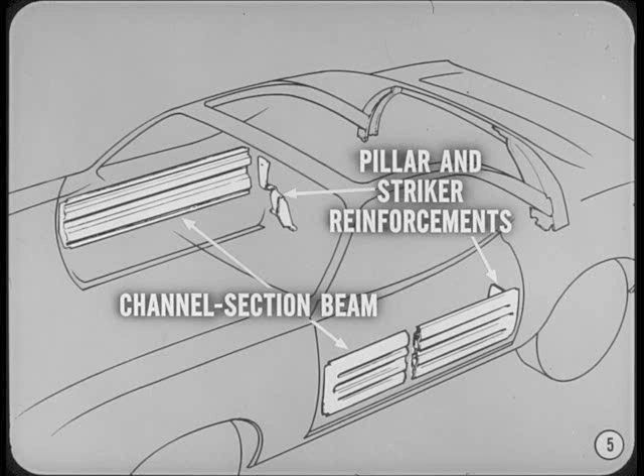Also, the lock pillars and strikers have additional reinforcements to resist accidental door opening in a collision. There are box section support structures built into both sides of the rear roof area to give more rollover protection. Along with this, the windshield header and roof rails are fully boxed to further strengthen the roof structure.

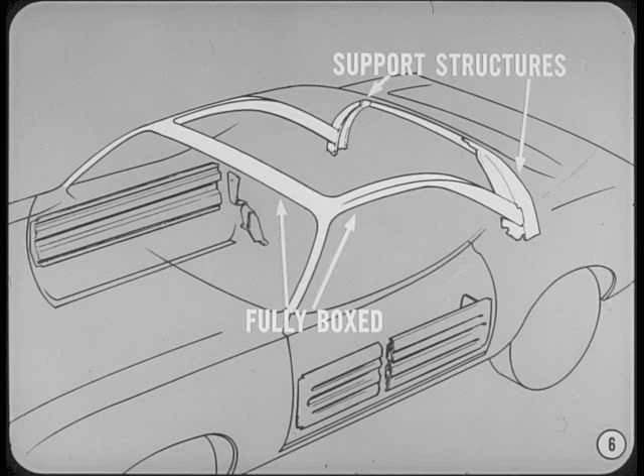The new flush-mounted outside door handle operates by lifting up and out to provide greater protection against accidental door opening. The door lock cylinder is located next to the lift handle and can be serviced through a hole in the inside door panel under the trim.

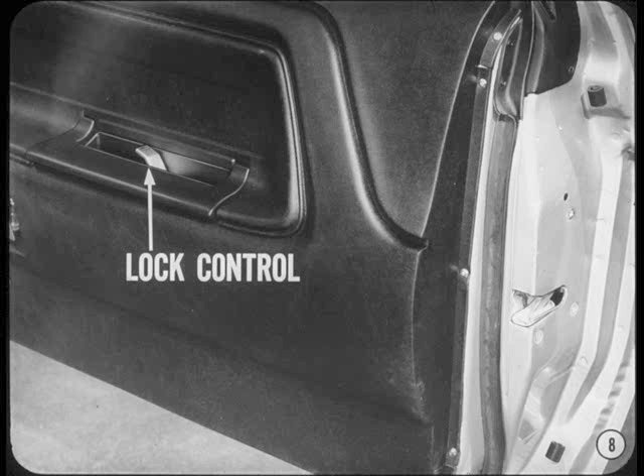On the inside, you'll find the door lock control located in the hand grip recess of the armrest. This new toggle lever control is convenient for the driver and passenger, but the location makes attempts at theft more difficult. A conventional link rod connects the toggle lever to the door lock.

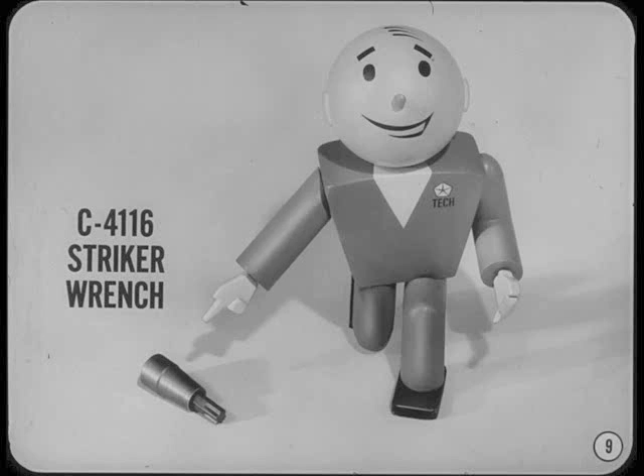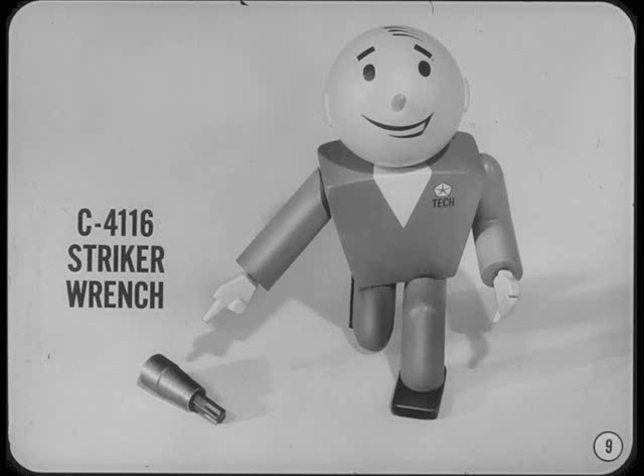Thank you, Bob. By this time, all you technicians should be familiar with a special wrench needed to adjust the door latch striker. So we'll let it go at that and move on to the steering columns. Ready to go, Joe? All ready, Tech.

Starting again with the Barracuda and Challenger models, we've got a brand new steering column with a corrugated impact-absorbing member at the upper end. The corrugations fold one by one to absorb impact energy. Actually, servicing the new steering column is simpler because the impact member is at the top, above the gear selector lever.

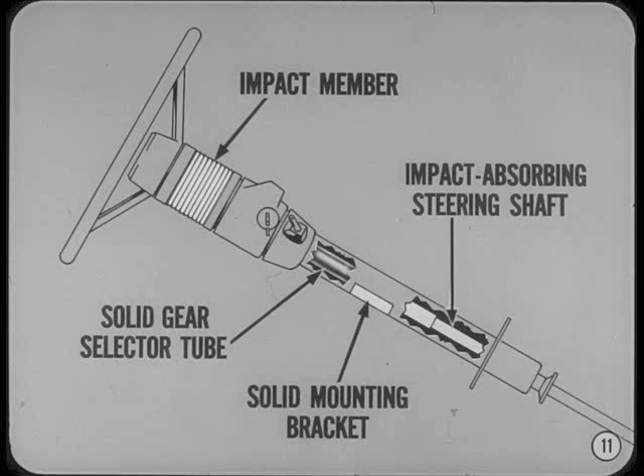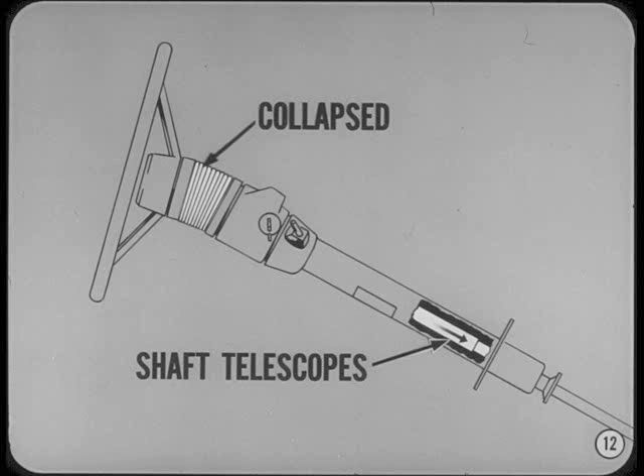While this design still requires an impact-absorbing steering shaft, it uses a solid gear selector tube and a solid mounting bracket. In other words, if the upper member is collapsed, but lower steering column parts are not damaged, you can replace the upper members separately. Of course, with complete or partial collapse, the steering shaft telescopes and must be replaced to restore its energy-absorbing characteristics.

As for removal, 3 stud nuts attach the steering wheel to the top of the collapsible member. When the wheel is off, you'll notice that the hub at the bottom has 2 tapped holes, so you can use a steering wheel puller to remove the member from the steering shaft.

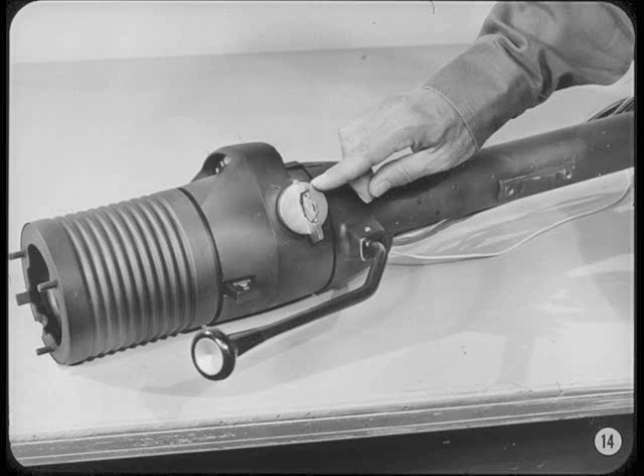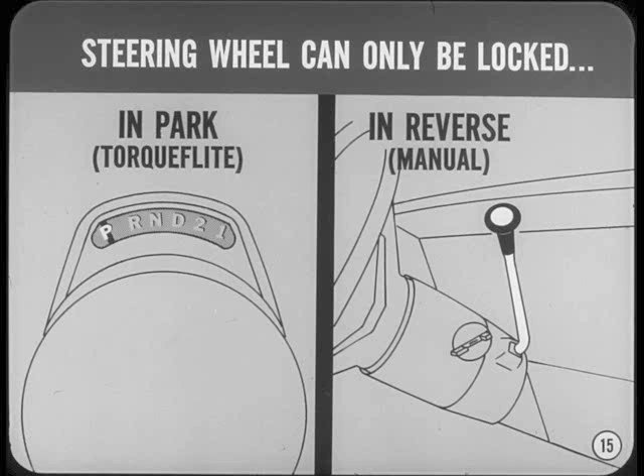Now, moving on to other features, all models now have a combined steering wheel lock and ignition switch located on the right-hand side of the steering column. As you probably know, the wheel cannot be turned when the key is either in lock or accessory position. The steering wheel can only be locked when the TorqueFlite selector lever is in park, or the manual transmission shift lever is in reverse. This arrangement keeps the steering wheel from locking when the car is moving forward.

In addition, the key can be removed only when the switch is in lock position. If the key is left in the lock, a buzzer reminds the driver to remove the key when either front door is opened. The locking mechanism in our standard columns is sturdy and simple.

Here's how it works. The heart of the lock mechanism is a pivoted 2-piece lock lever and its operating cam. The key cylinder turns the cam to tilt the lock lever in or out of mesh with the gear selector housing and the steering shaft lock plate. Turning the cam also operates the ignition switch.

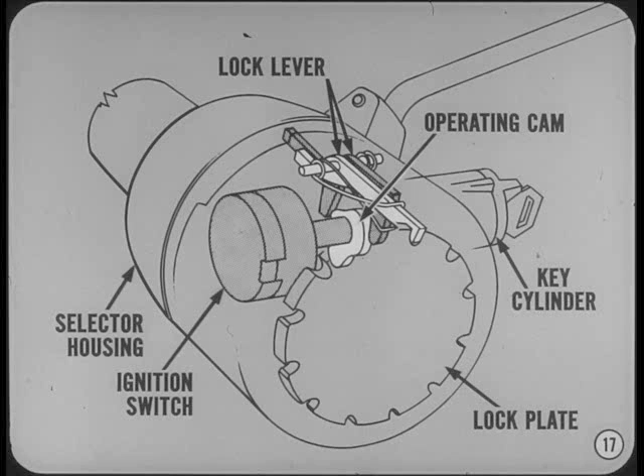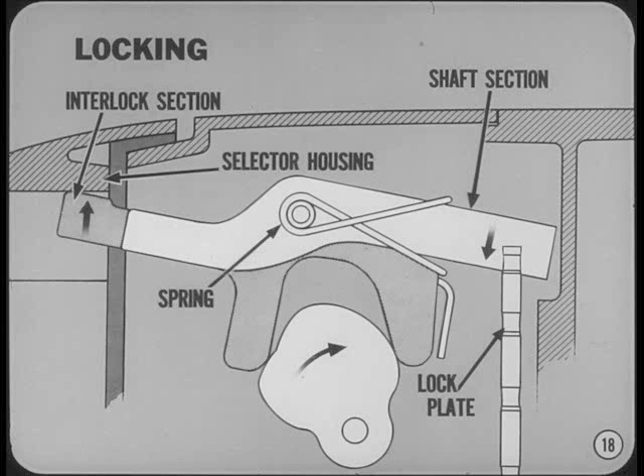In the locking direction, the cam moves the selector interlock section of the 2-piece lever toward the selector housing wall. This movement spring-loads the steering shaft section of the lever and moves it into mesh with the steering shaft lock plate.

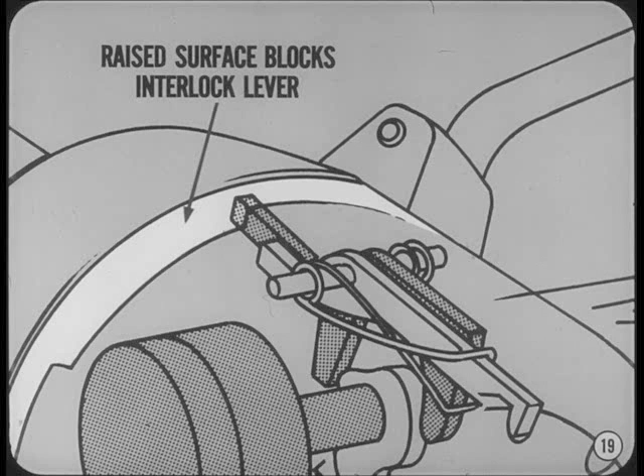If the gear selector lever is not in locking position, a raised surface in the selector housing wall blocks movement of the interlock lever. This blocking action limits the operating cam rotation and keeps the entire mechanism from going into lock position. Cars with a floor mount selector have a separate slave linkage, which moves the column selector housing to the locking position.

Remember that adjustment of both the slave and the selector linkage affects steering lock operation. If the adjustment is off, you may not be able to turn the ignition key to the lock position.

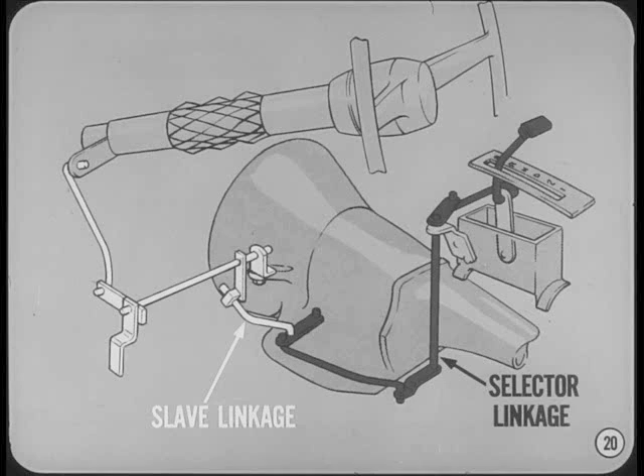Now, on columns with a tilt wheel mechanism, the key cylinder turns a toothed sector, which causes a sliding bolt to move in or out of the steering shaft lock plate. The sector also moves a rack and sliding bolt to provide a selector lever lock.

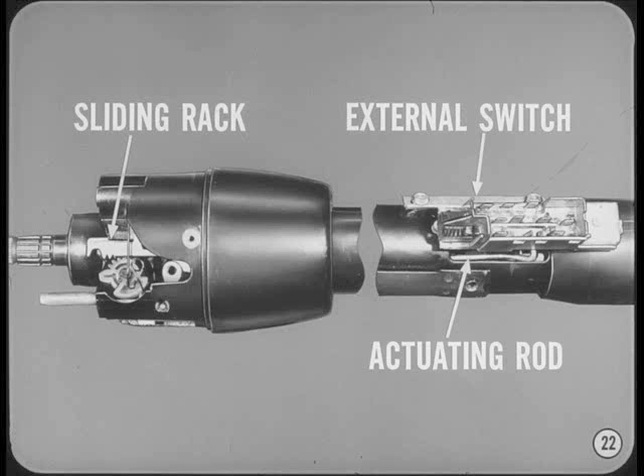On the tilt wheel columns, an actuating rod attached to the rack operates an external ignition switch. Well, that's because these columns don't have space for the internal type switch used on standard columns.

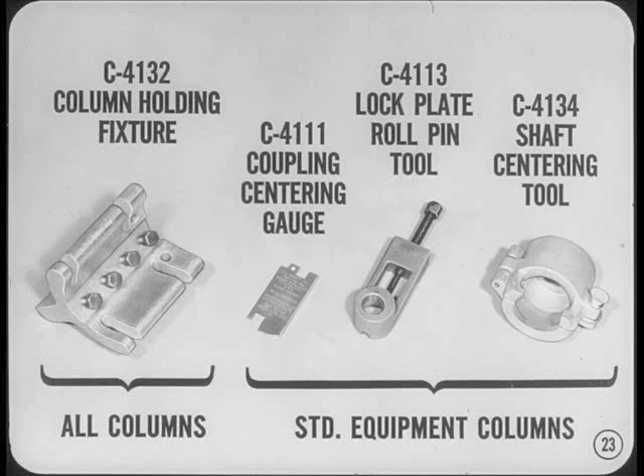As you might expect, steering column changes call for new special tools. There's a new holding fixture for all energy-absorbing columns, old and new. For standard equipment columns, you'll need the new coupling centering gauge, lock plate roll pin tool, and the shaft centering tool. In addition, there's a new lock plate nut socket and a retaining ring installer for tilt columns.

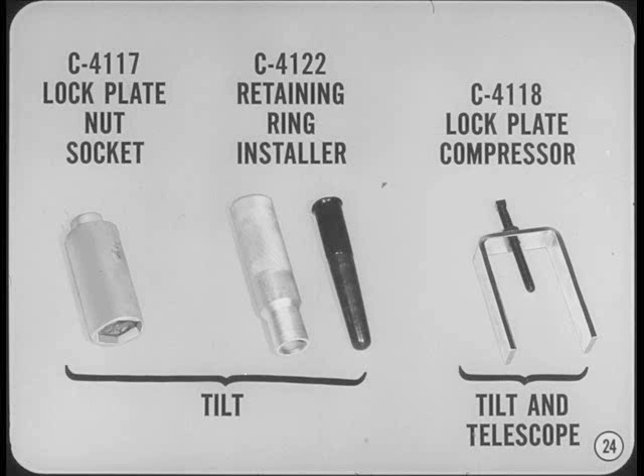And for tilt and telescope columns, the new lock plate compressor makes the job easy. Did I skip anything, Tech? Well, the shift linkage adjustments of some models are relocated for easier servicing. But we don't have time to cover linkage details right now, so if there's any doubt about adjustments, be sure to check your service manuals.

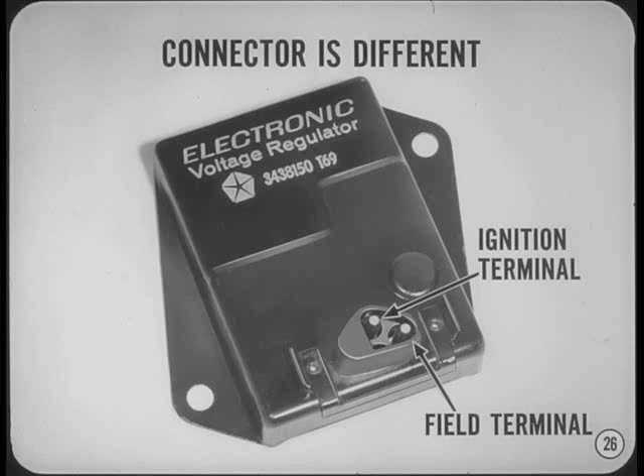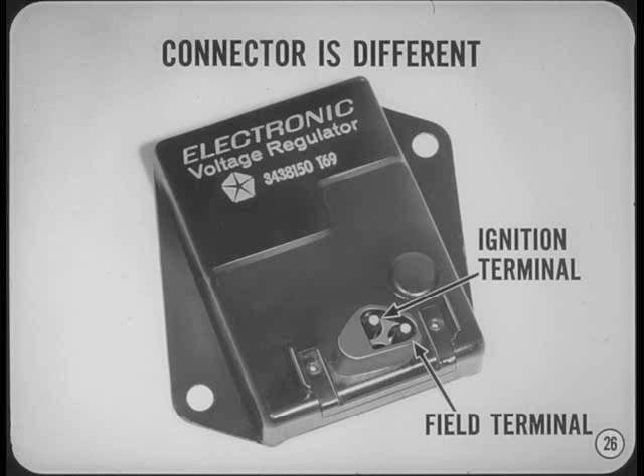Bob, what's new in the charging system? All models now have the new electronic voltage regulator. This unit is similar to the earlier model, but the circuit connector is different, so it's not interchangeable. Since these regulators do not have moving parts or adjustments, they are serviced by replacement.

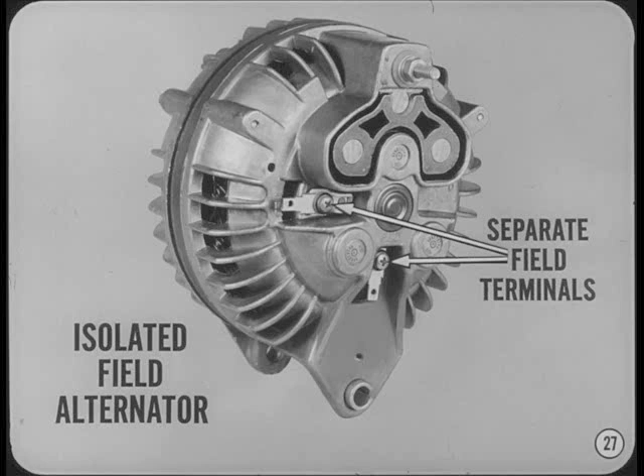A new isolated field alternator is used with the electronic voltage regulator. Both field rotor brushes now have separate connector terminals, and there are corresponding changes in the circuit. As with the voltage regulator, this alternator is not interchangeable with the previous model.

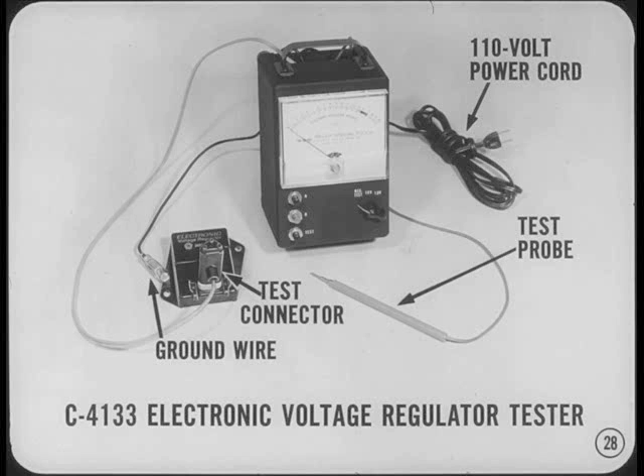The new electronic voltage regulator tester makes charging system checking easy. For either type regulator, you simply plug in the test connector, clip on the ground wire, and plug in the power cord. The test probe is used for alternator output and other voltage checks.

And while we're talking about things that make servicing easier, you'll find the new wire terminal removal tool a real time saver when you work on the new pin-type connectors. Press the connector down on the tool to unlock the wire terminal tabs and pull the wire out of the connector block.

On Imperials, the outside radio antenna is no more. The antenna now consists of two concealed wires sandwiched in the laminated windshield glass. The wires run upward at center and across the top of the glass to both sides. The antenna connection is located at the center of the windshield base.

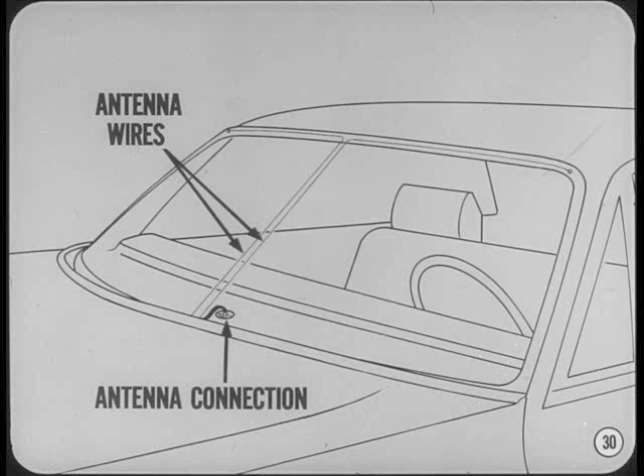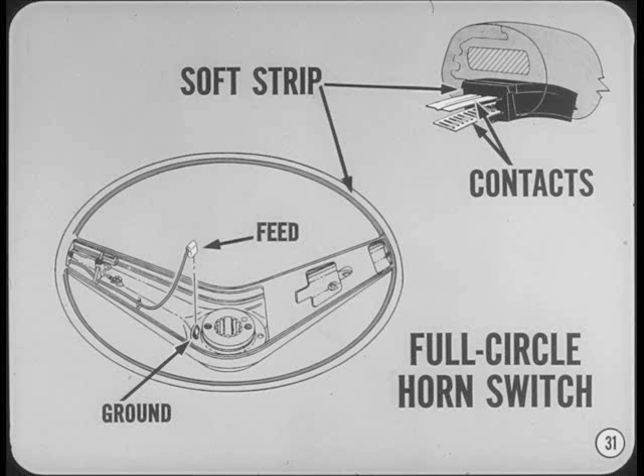Also standard on Imperials, the new full-circle horn switch operates when you squeeze the soft strip on the inner surface of the steering wheel rim. Strip contacts in the rim close the circuit when pressed together. This feature is optional on other models.

Combined lamp and reflector type body side markers are now used on all models. As on previous models, the lamp housing must be removed for lamp replacement. Thank you, Bob. That'll keep the electricians busy for a while. Right now, it's time to hear from Joe on air conditioning features.

Okay, Tech. All of our manual-type air conditioning systems now have a new pilot-operated EPR valve. Except for the specs, testing procedure remains the same as before. The valve adjustment is preset and should not be disturbed.

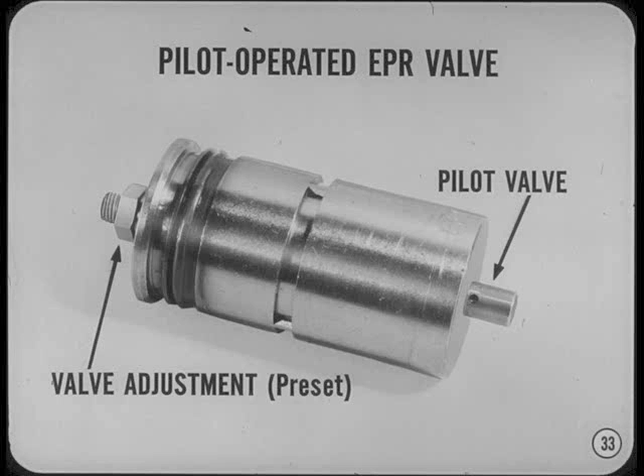As the name suggests, the pilot valve triggers the main valve to make overall EPR valve operation more sensitive and precise. Only the piloted EPR valve can be used in our current air conditioning systems, but replacements for earlier systems can be either the piloted or non-piloted type.

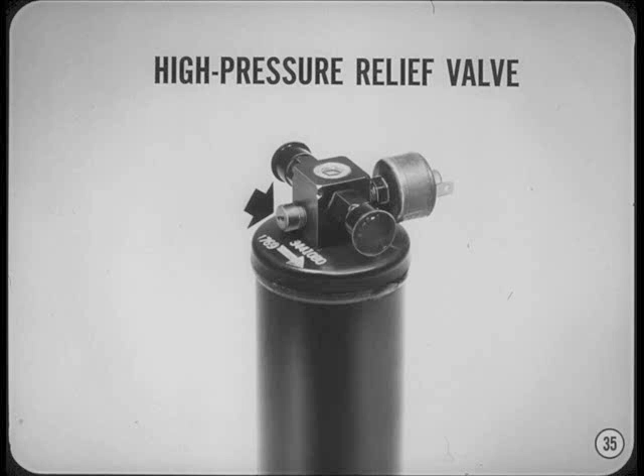In all of our receiver dryers, a high-pressure relief valve now replaces the fusible plug. Instead of a complete discharge and possible loss of compressor oil, this valve vents only the amount of refrigerant needed to restore normal system pressure.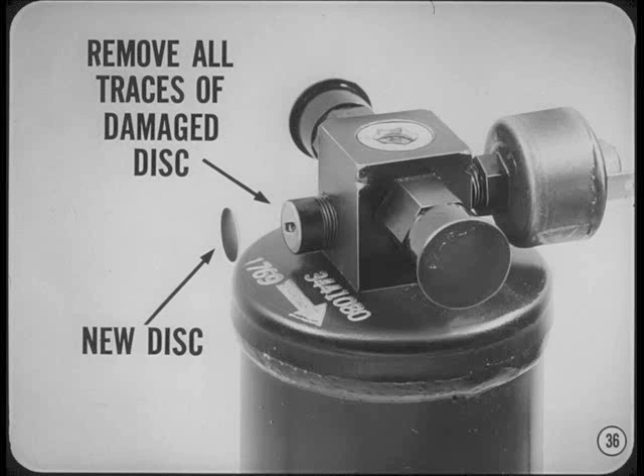A protective plastic disc keeps humidity, dirt, and salt out of the pressure relief valve. For replacement, remove all traces of the damaged disc and apply a new disc cut from adhesive mylar or similar material.

Masking or electrical insulation tape should not be used.

And that brings us to the halfway point of our roundup. Joe will continue with the rest of the air conditioning story as soon as someone turns the record. So, relax a bit. Thank you, Tech.

Now, back to air conditioning. All of our receiver dryers also have a low-pressure limit switch, which opens to interrupt the compressor clutch circuit and stop the compressor if system pressure drops below 23 pounds. This protects the compressor against loss of oil and dry run damage if the system is suddenly discharged.

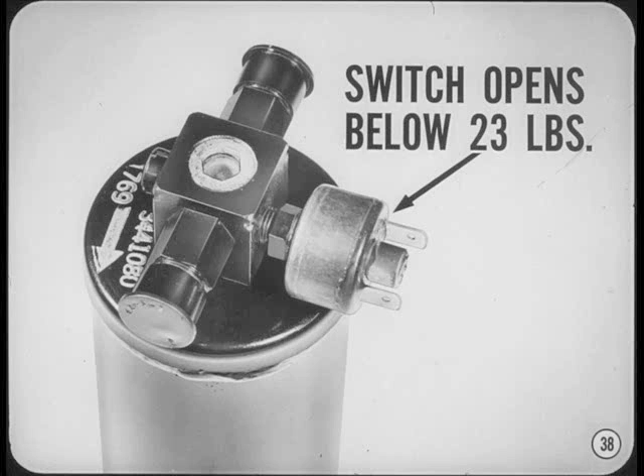A new water valve for our intermediate-size models combines cable and vacuum control. The vacuum actuator overrides the cable control when the off or max AC button is in and stops flow through the heater core. This action reduces condensation on the evaporator surfaces.

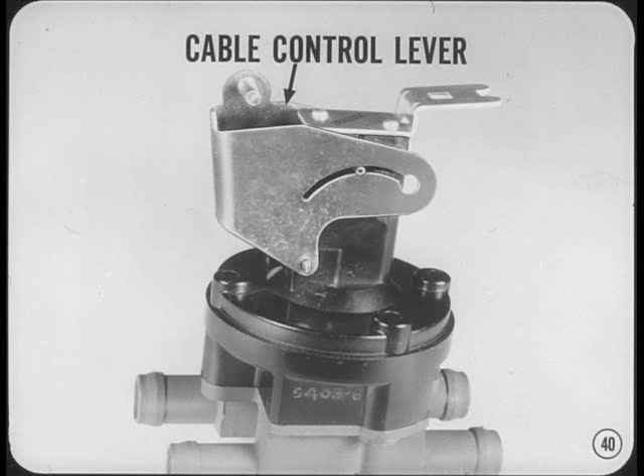The water valve for Barracuda and Challenger air conditioning is fully cable controlled. It has the same flow-through and bypass feature as the vacuum-operated valve used on our full-size models. And that about covers the components.

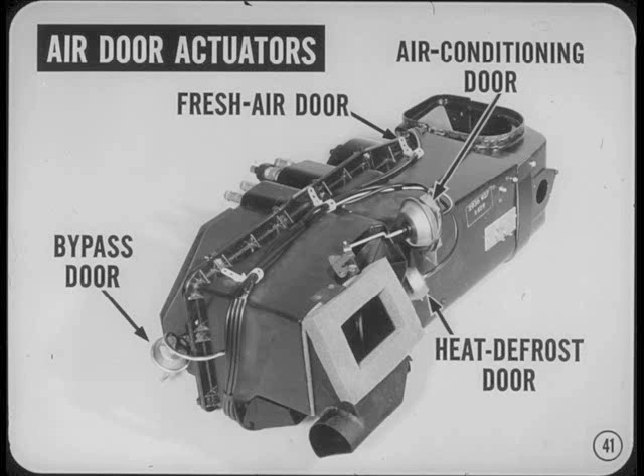We have a brand new air conditioning installation in Barracuda and Challenger models. The main difference is in the evaporator heater assembly, which has 4 direct-acting air door actuators and no linkage adjustments. The internal airflow pattern also differs from other models.

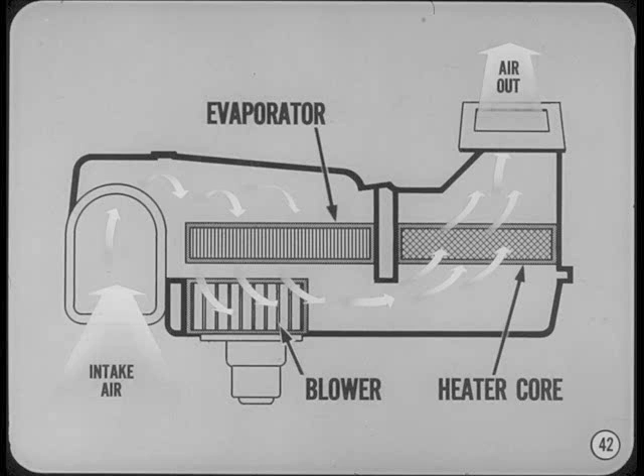Cowl intake air flows through the evaporator to the blower. From there, it passes through the heater core out into the passenger compartment. This flow pattern helps to dry the air and reduces defroster condensation on the windshield. So much for air conditioning. Bob, we're ready for engine and fuel system features.

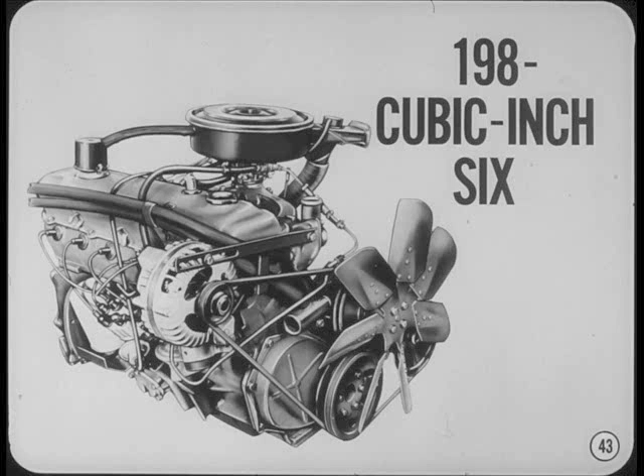Coming right up, Tech. The big news is the 198 cubic inch 6, which is now standard equipment in the Valiant and Dart. This engine is essentially the same as the 225 cubic inch 6, except for shorter crankshaft throw and longer connecting rods.

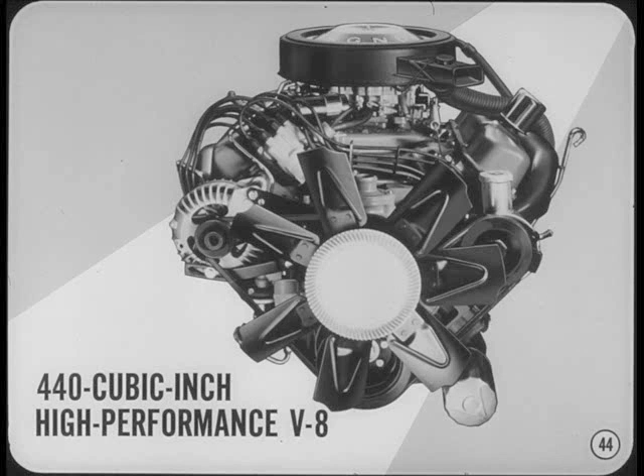Our 440 high-performance engines and those with 3 two-barrel carburetors now have heavier connecting rods and piston pins, along with a vibration damper and torque converter or flywheel balanced to match. None of these parts can be used separately without upsetting the engine balance.

The new hydraulic tappet used in some of our 1970 engines has a larger diameter plunger, so you'll need the new removing and installing tool. This new tool can also be used on previous tappets and does a good job where the tool cannot be aligned with the tappet bore.

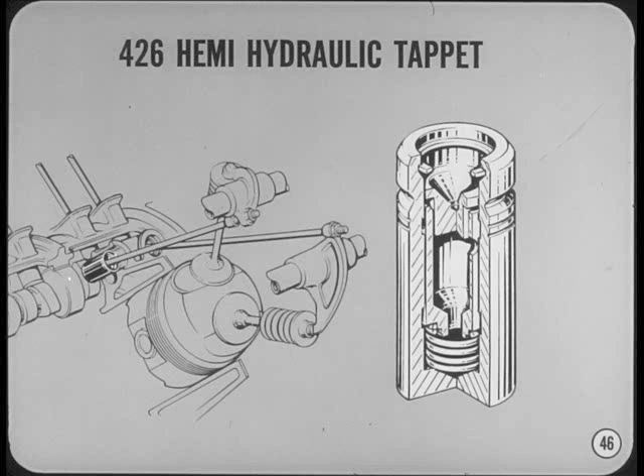The 426 HEMI engine now has hydraulic tappets. This results in a quieter engine and reduced maintenance. There are other design and material improvements in our 1970 engines, but we've covered the major changes, so now we can go on to fuel system features.

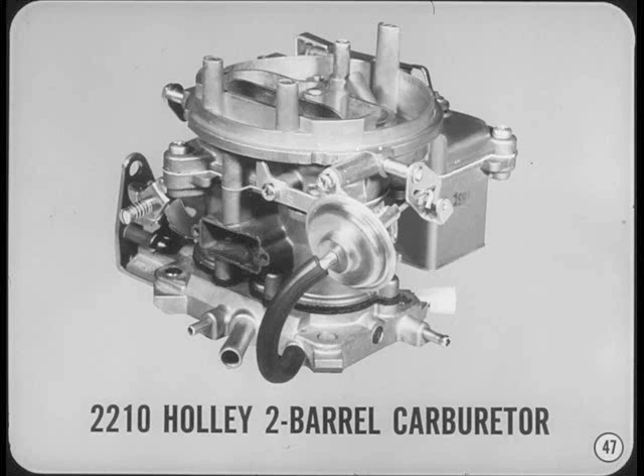First of all, there's a new Holley two-barrel carburetor for some of our 383 V8 engines. This carburetor has a conventional horizontal float bowl chamber, a vacuum piston-operated power valve, and a plunger-type accelerating pump. Servicing details and specs are in the service manuals.

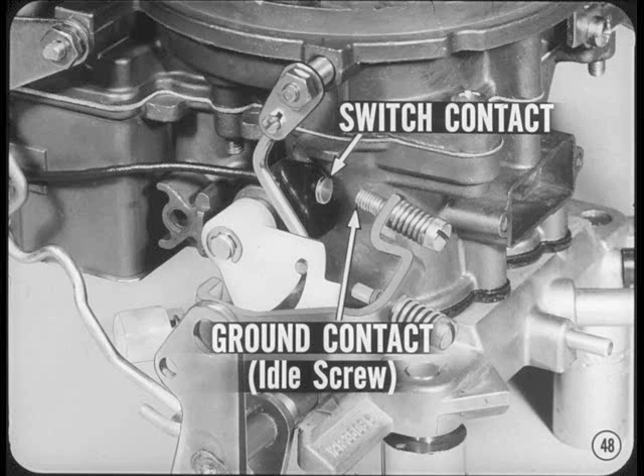A new feature of this carburetor is the switch for the distributor retard solenoid. The curb idle adjusting screw acts as the ground contact of this switch, completing the circuit when the throttle closes. We'll get into details of the solenoid farther on.

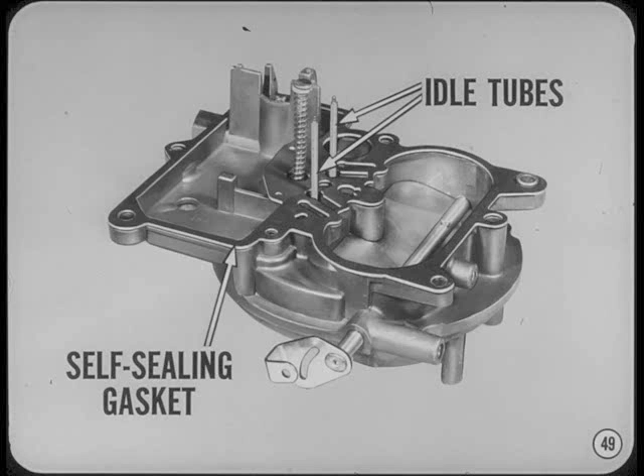Incidentally, when you service this carburetor, remember that the idle tubes are pressed in and can be bent or damaged if the air horn is not handled carefully. To remove the self-sealing air horn gasket, soak the part in solvent and clean off any fragments with a fiber scraper. Metal scrapers will damage sealing surfaces.

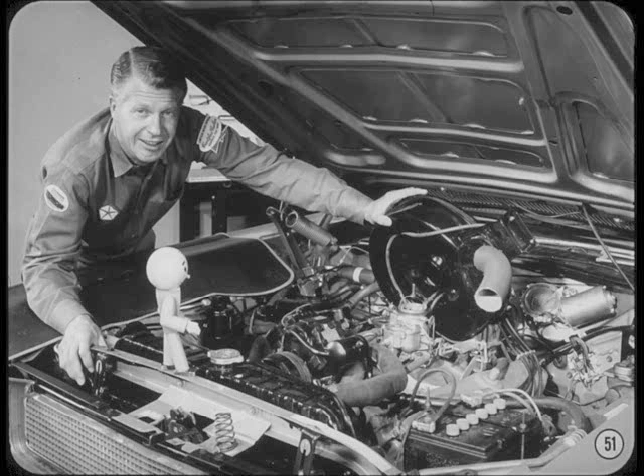The choke side main jet is smaller than its mate by 2 size numbers, so don't get them switched. And for power valve service, be sure to use a wide blade tool with a center relief slot to avoid valve stem damage. Now, as for exhaust emissions, several changes in our 1970 models improve emission control and drivability.

Most of our engines now have a heated inlet air system to permit a leaner warm-up mixture. In effect, this system reduces the amount of choking needed for good warm-up drivability. Here's how it works. If temperature in the carburetor air cleaner is below 100 degrees, direct air intake is blocked by a vacuum-actuated air valve controlled by a thermostat in the air cleaner.

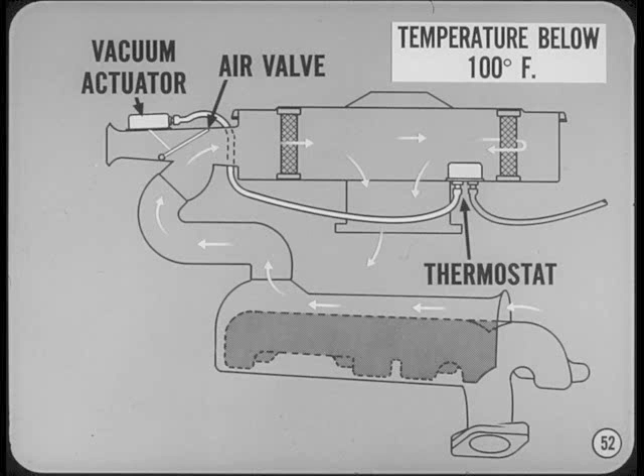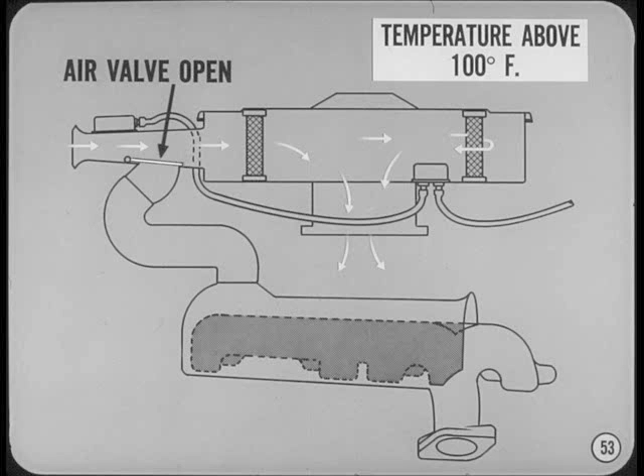Inlet air then comes in through an exhaust manifold stove where it is heated on its way to the air cleaner. When air cleaner temperature rises above 100 degrees, the thermostat and actuator operate to open the air valve. Inlet air now enters the air cleaner directly without being preheated.

Also in the emission control department, we have a throttle stop solenoid on our high-performance engines. It maintains the relatively high idle speed needed to hold emissions down during idle and deceleration. The solenoid plunger retracts when the ignition is switched off. This allows more complete throttle closing to prevent after running.

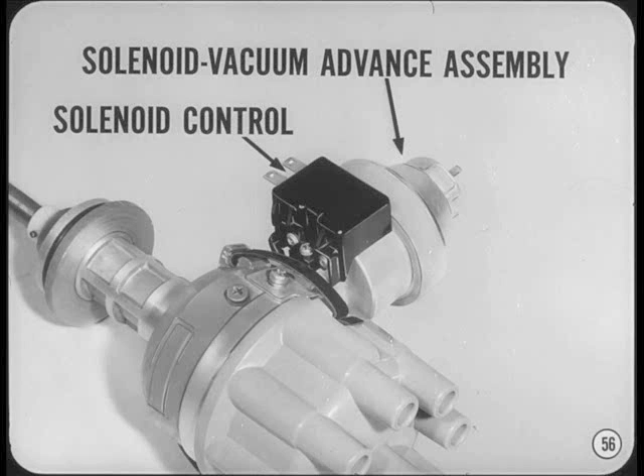The throttle stop solenoid on our standard 440 V8 also includes a switch contact for the timing retard solenoid. As on the new Holley 2-barrel carburetor, the ground contact of this switch is the curb idle speed adjusting screw. All of our 383 and 440 engines, except the 440 with 3 2-barrel carburetors, have a timing retard solenoid on the distributor vacuum advance assembly. This solenoid retards the timing for emission control at idle without limiting the advance needed for good starting and driving.

The 1970 Chrysler Corporation cars sold in California have a new evaporation control system with a vapor-liquid separator. This is a closed venting system for the carburetor and fuel tank, which reduces the loss of fuel vapor. The basic system is quite simple and requires no regular maintenance.

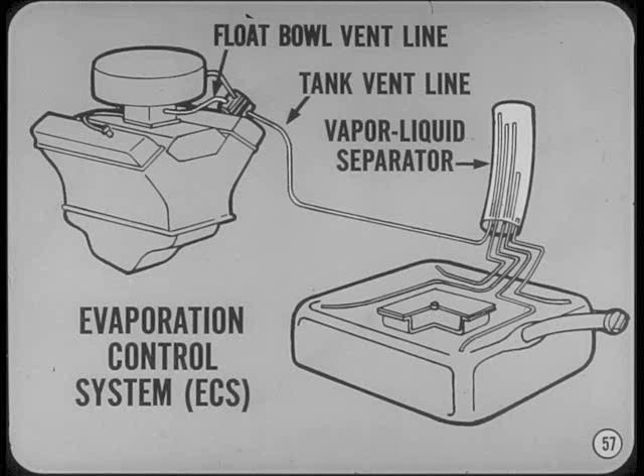Fuel vapor from the carburetor float bowl passes through a vent line to the crankcase air cleaner and settles in the crankcase. When the engine is running, the vapors are purged from the crankcase and intake manifold by the crankcase ventilation system. The fuel tank vent line also leads to the crankcase air cleaner. To keep liquid fuel out of the tank vent line, a vapor-liquid separator traps any liquid coming from the tank vents and returns it to the tank. The tank filler tube has a sealed cap.

Okay, Bob, take a breather. Joe can add the finishing touches to our Roundup. Right, Joe? Right, Tech.

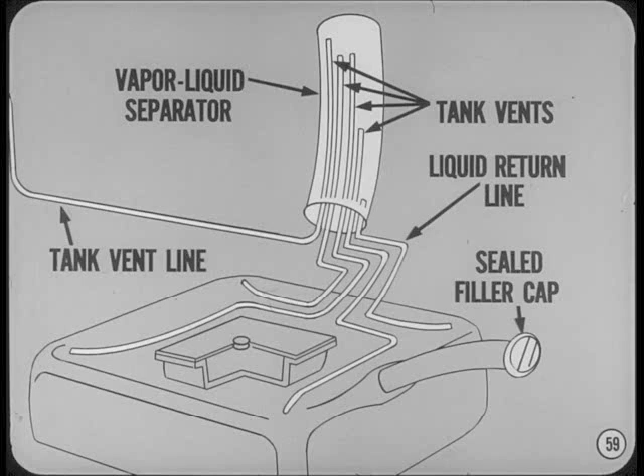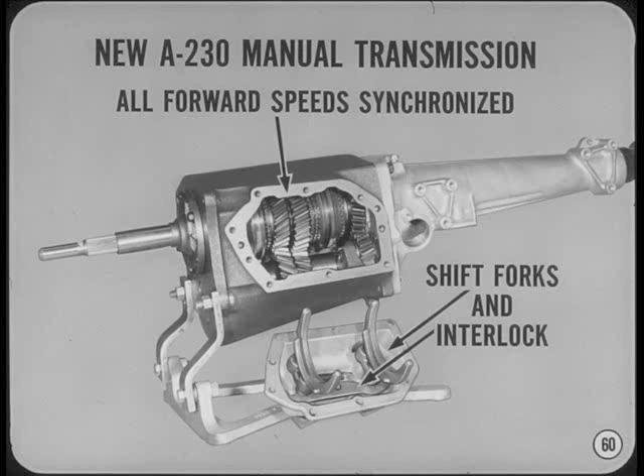And first in line, we have a brand new 3-speed manual transmission with all forward speeds synchronized, eliminating the need for the previously used clutch interlock. Shift forks and the shift interlock are located in the housing cover for easier servicing. All gears, including reverse, are in constant mesh. In shifts, the synchronizer ring picks up the desired gear and brings it up to speed. Synchronizer spline teeth block gear engagement until rotating speeds are equalized.

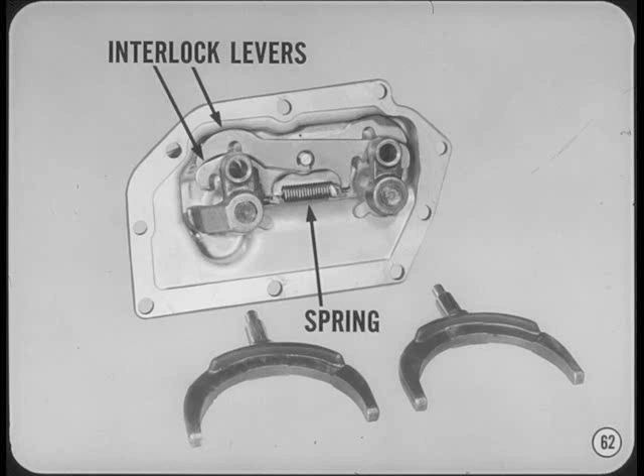Incidentally, the counter shaft in this job is longer, so you'll need the new shaft bearing arbor. The new interlock mechanism uses a pair of notched, spring-loaded levers to prevent selecting 2 gears at the same time. When shifting, the over-center spring and lever cam action assists the shift.

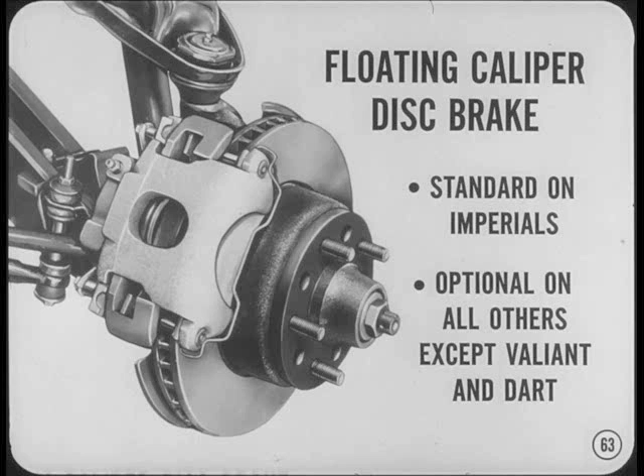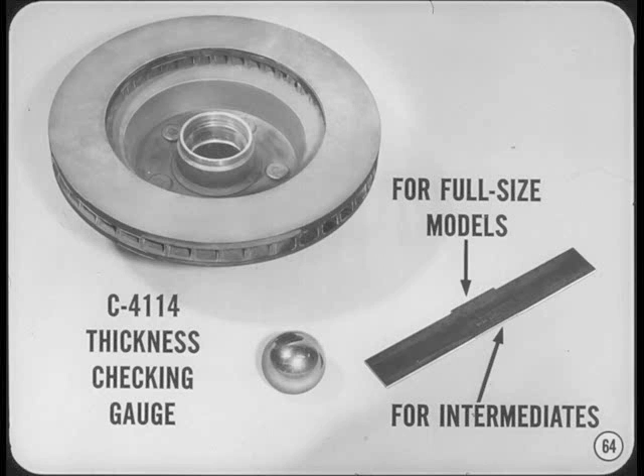And that brings us to brakes. The floating caliper disc brake is now standard on Imperials and optional on all other models except Valiant and Dart. Brake servicing procedures are the same as on previous models. Before machining a floating caliper brake disc, use the new thickness checking gauge to determine how much material can be safely removed from each side. The extended side of the gauge plate is for checking discs of full-size models. The recessed side is for the intermediates.

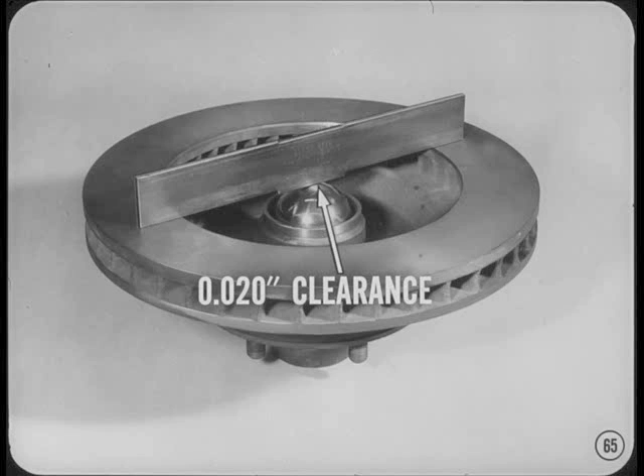Now, to make the check, put the gauge ball in the inner bearing cup and the gauge plate over the ball's center so you can check the clearance with a feeler gauge. As an example, let's say it measures 20 thousandths. This is the amount of material you can remove from the inner disc surface. Next, mic the disc. And for our example, assume that we get a reading of 1.245.

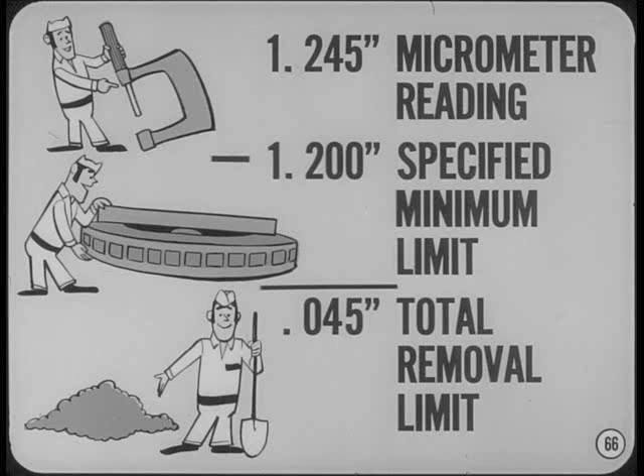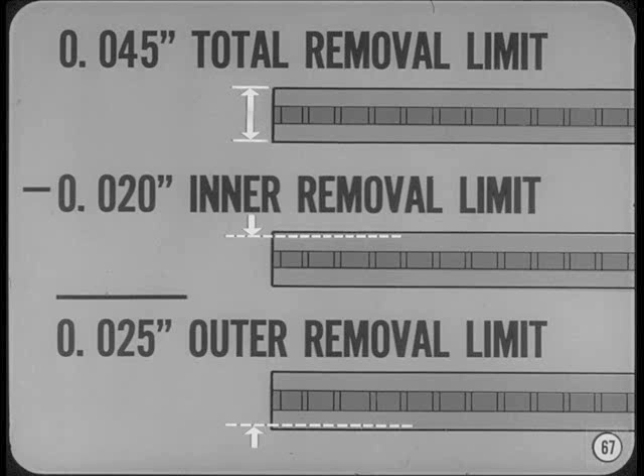From this measurement, we subtract the 1.200 minimum thickness limit specified for these models and get a 0.045 total removal limit. Now, to determine the outer disc surface limit, take the 0.045 total limit figure and subtract the 20 thousandths inner surface removal limit that we got with the ball and gauge plate. This leaves a 0.025 removal limit for the outer surface.

Now, besides disc servicing, when you bleed these floating caliper disc brakes with a pressure tank, the plunger and the new metering valve must be held out to keep the valve from operating. Simply compress the brake bleeding tool and engage it in the push rod groove. Never, and I repeat, never forget to remove the tool when you're finished.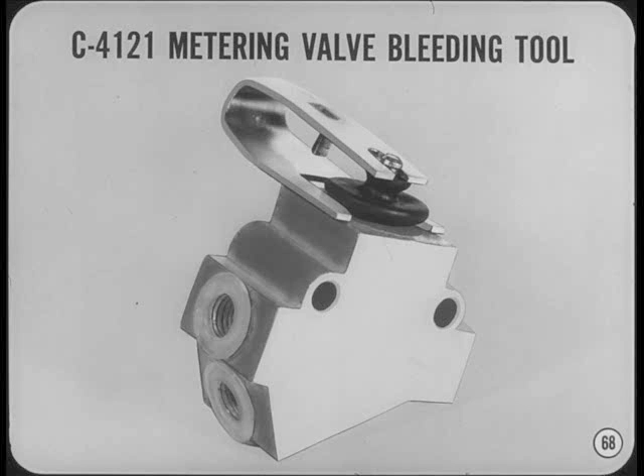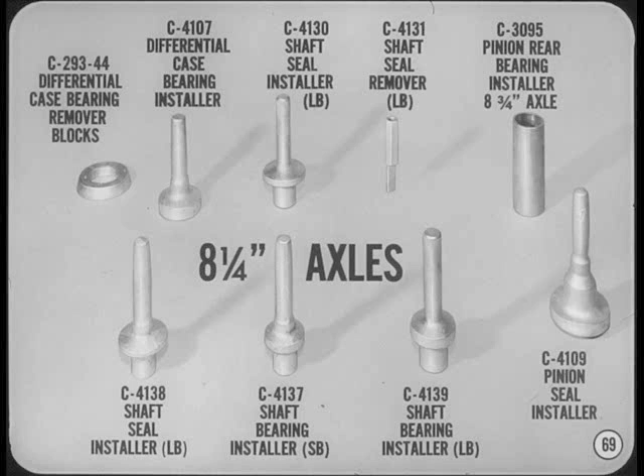Thank you, Joe and Bob, for an informative session on 1970 model service highlights. Right now is a good time to grab those reference books and service manuals for a follow-through where we couldn't give you all the details.